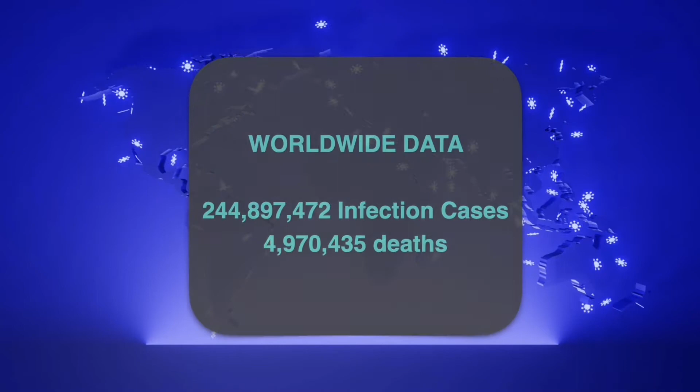What is COVID-19? COVID-19 is an ongoing global pandemic of coronavirus disease 2019, caused by severe acute respiratory syndrome coronavirus 2. It was first noticed in Wuhan, China in December 2019. The World Health Organization (WHO) declared a public health emergency of international concern on 30 January 2020, and a pandemic on 11 March 2020. The disease is the third coronavirus of the 21st century. The latest global update on COVID-19 cases is over 200 million infections with about 4 million deaths.

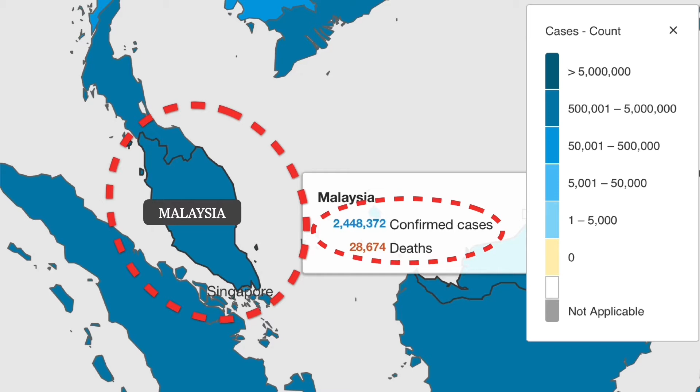For Malaysia's latest update, over 2 million cumulative infection cases with above 28,000 deaths. This data was retrieved from the WHO website on 28 October 2021.

Where did coronavirus originate? COVID-19 is first speculated to have originated from bats, to animals sold for food at the market in Wuhan, China. Recent studies have confirmed that bats constitute a reservoir for the COVID-19 virus.

Why is it dangerous to us? The virus spreads on moisture droplets through the air or surfaces, eventually finding its way inside our bodies, typically through the eyes, nose, and mouth. The virus is transmitted through the respiratory tract when people breathe in droplets and tiny airborne particles released from infected people when breathing, talking, coughing, and sneezing.

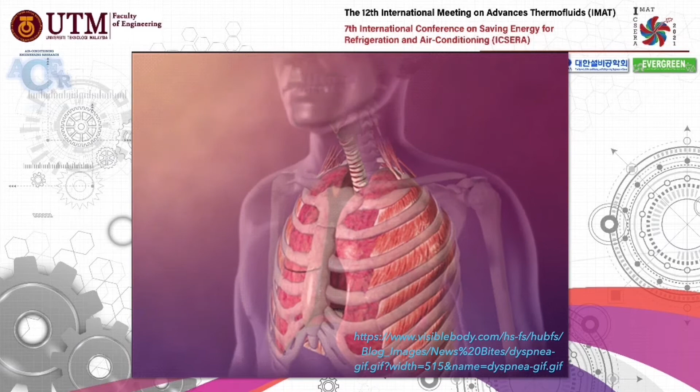The probability of inhaling these droplets is highest when people are adjacent to the infected one. Infected people are more likely to transmit COVID-19 when they are physically close. The droplet size is between 1 to 10 micrometers in diameter. The larger droplet, between 5 to 10 micrometers, travels a shorter distance, between 1 to 2 meters from its source.

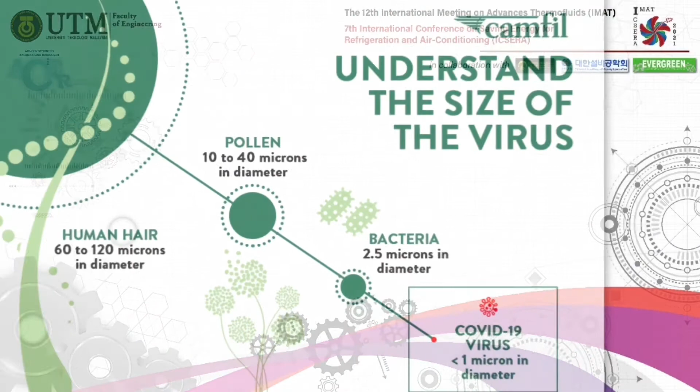The illustration shows a comparison in diameter between the COVID-19 virus relative to several other particles and human hair. This figure shows that the COVID-19 virus is the tiniest, yet dangerous.

The larger droplet usually settles on the ground due to gravitational effects, especially indoors. The infected person may remain contagious within 20 days and spread the virus even if they do not develop symptoms.

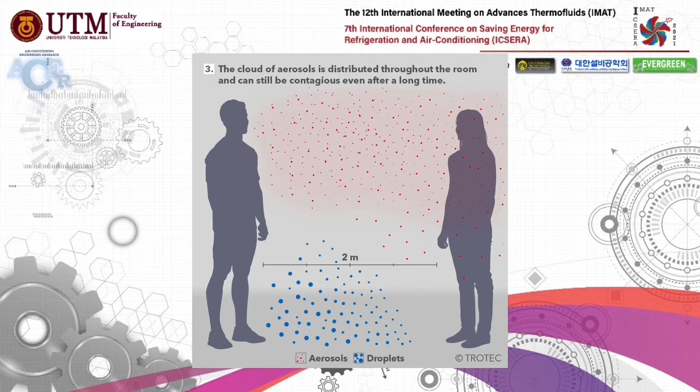On the other hand, the tiny droplets, known as aerosols, less than 5 micrometers in diameter, travel exceeding 2 meters and stay in the air for 3 hours, affecting a secondary recipient without contact with the first host.

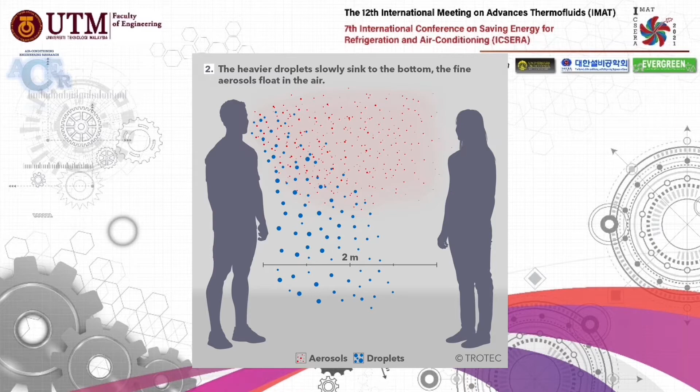How dangerous is the virus to us? The coronavirus invades the cells in the back of the infected person's nose, reproducing and spreading downward, infecting healthy cells along the way.

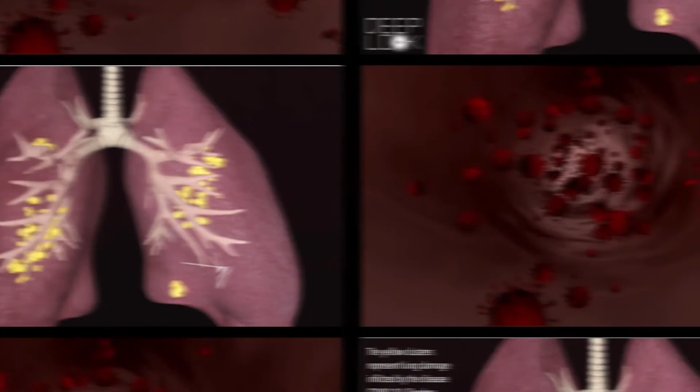COVID-19 harms the lungs of people who are affected by the disease. These lung injuries can lead to acute respiratory distress syndrome, from which most people with COVID-19 die.

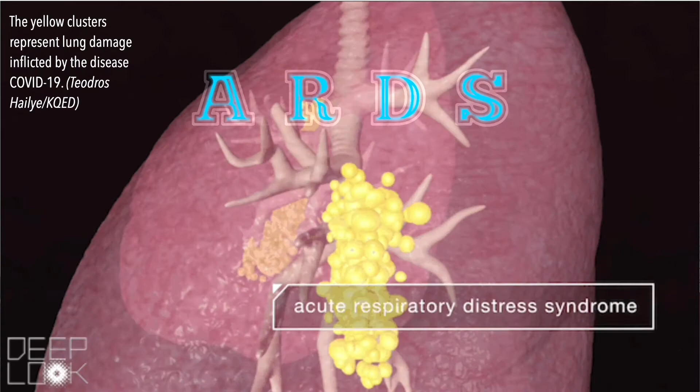Acute respiratory distress syndrome is a severe lung problem. Fluid builds up in the lungs, causing breathing failure and low oxygen levels in the blood. ARDS is life-threatening because it keeps organs like the brain and kidneys from getting the oxygen they need to work. It can also put a strain on the heart.

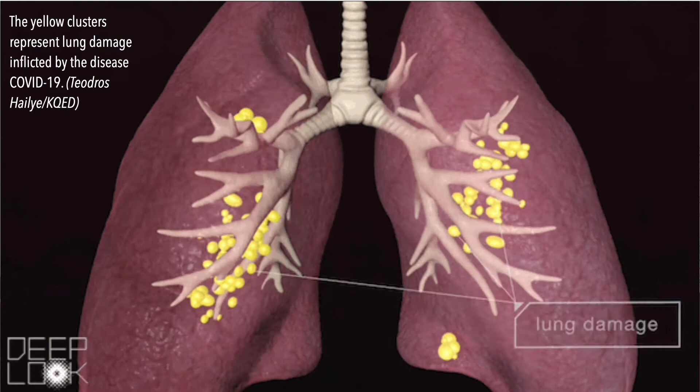Based on the animation, the yellow clusters represent lung damage caused by the disease COVID-19.

Three common clusters of symptoms have been recognized. The first is the respiratory symptoms cluster, with cough, sputum, shortness of breath, and fever. The second is the musculoskeletal cluster, with muscle and joint pain, headache, and fatigue. The last is digestive symptoms, with abdominal pain, vomiting, and diarrhea.

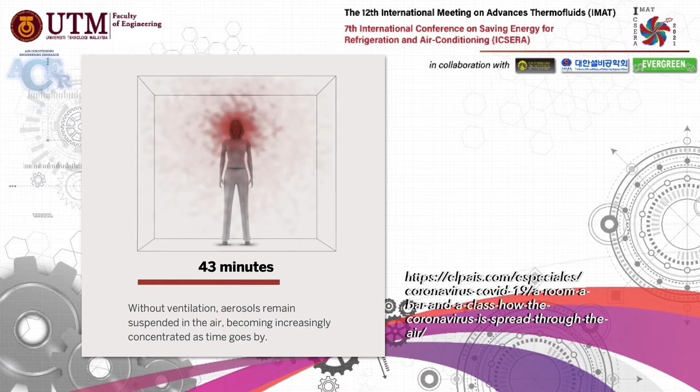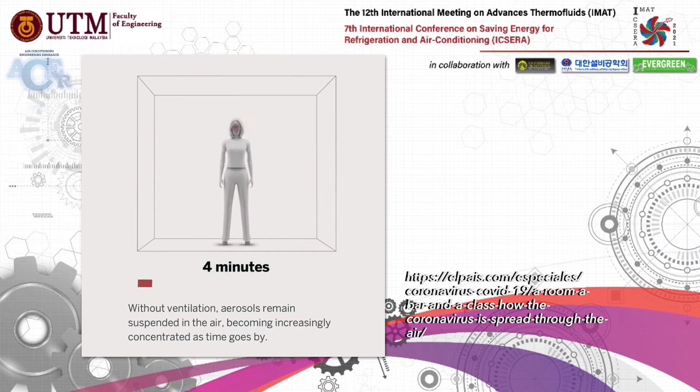Droplets or aerosols are an essential source of contagion in confined spaces. Based on the simulation displayed, without ventilation, aerosols remain suspended in the air, growing in concentration as time goes by. Recent studies reported that the majority of COVID-19 infections occurred indoors.

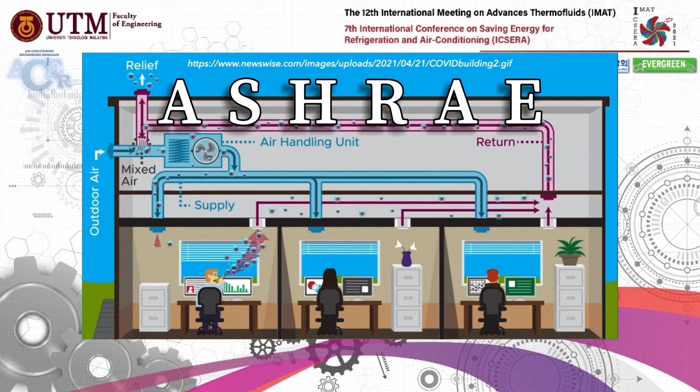Many researchers agree that a proper ventilation system is essential to combat the COVID-19 virus inside indoor spaces. The American Society of Heating, Refrigerating, and Air Conditioning Engineers (ASHRAE) has introduced and adopted a new direction to alleviate airborne transmission inside buildings. The regulation focuses on increasing the air exchange rate, supplying adequate outdoor fresh air, filtration, and extending ventilation duration.

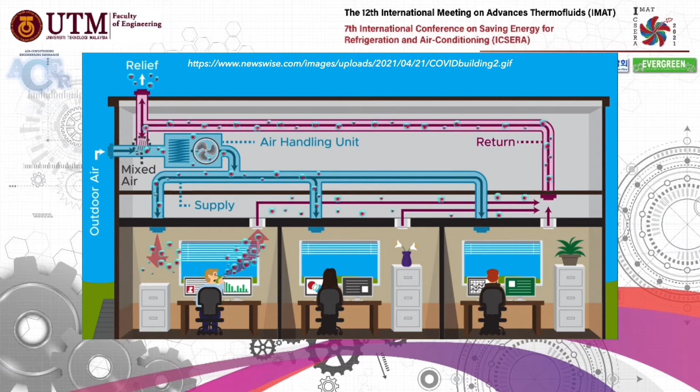The ventilation system's performance is determined through airflow characteristics and the air exchange rate. What is an air exchange rate? It is the number of times per hour that fresh air from outside enters a room and is mixed and exchanged with stale air from inside. The air exchange rate tells us how fast we can clear the room of any airborne contaminants.

Why is this important? Because if the air change rate is too high, a room loses energy spent on cooling. If the rate is too low, the room air becomes stale and stagnant, leading to a build-up of toxins, viruses, and pathogens.

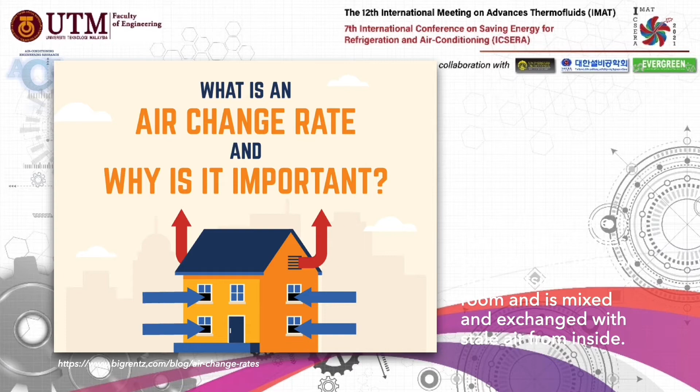Based on this illustration, two types of airflow enter the house: fresh air from outside and cold air from the air conditioning's specified air vents.

The purpose of this airflow is to exchange air with the warm air inside. This process repeats, and the number of cycles is based on the number of occupants, building location, and type.

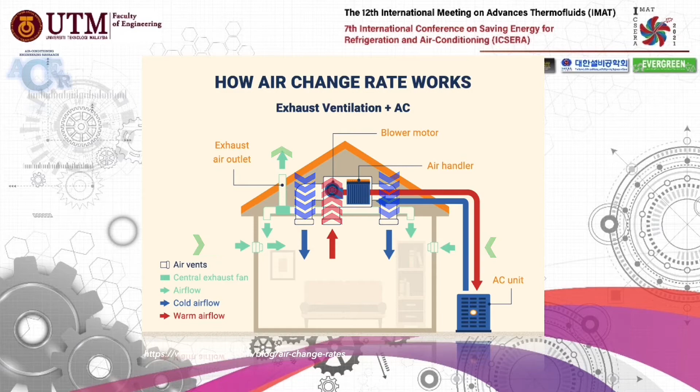Understanding the air exchange rate of a building is essential for health.

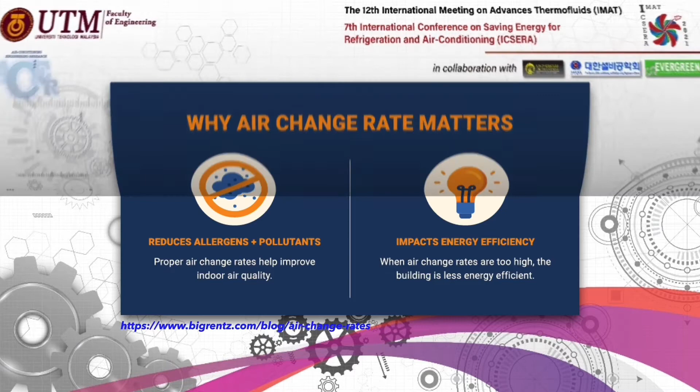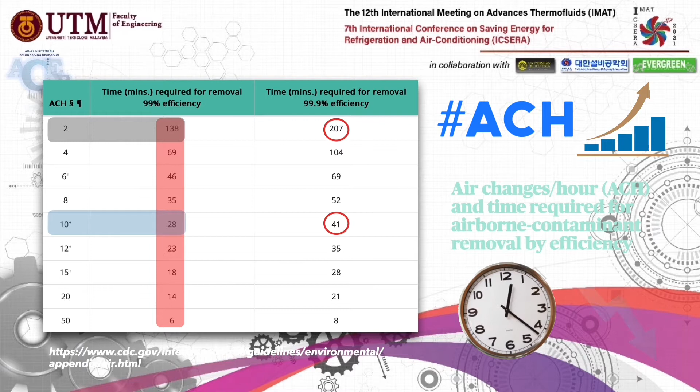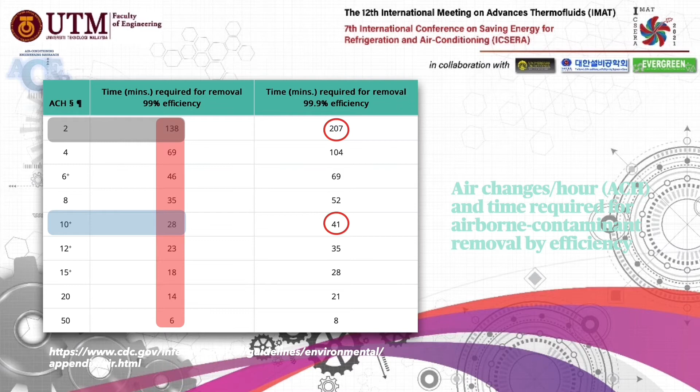ASHRAE recommends 3 to 6 air changes per hour for offices and schools to help with the pandemic. The higher rate can be accomplished by opening doors and windows and using filtration systems.

However, the trade-off from increasing the air exchange rate is decreased energy efficiency.

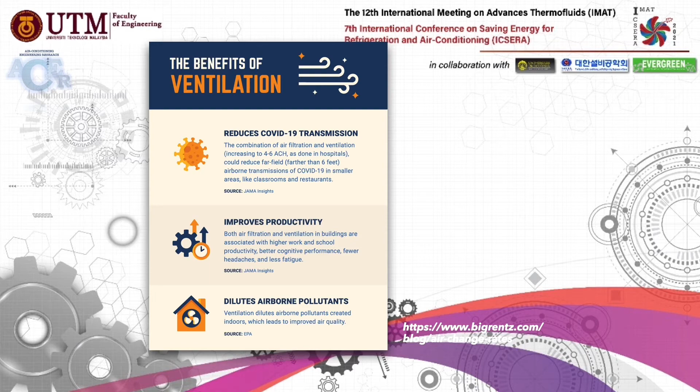When inside air is mixed with outside air at the proper frequency, air quality increases and the chances for epidemics or other health risks decrease.

Not only that, but an excellent air exchange rate, utilizing both passive ventilation such as doors and windows and active ventilation

such as heating, ventilating, and air conditioning systems, helps ensure that everyone inside is as comfortable as possible.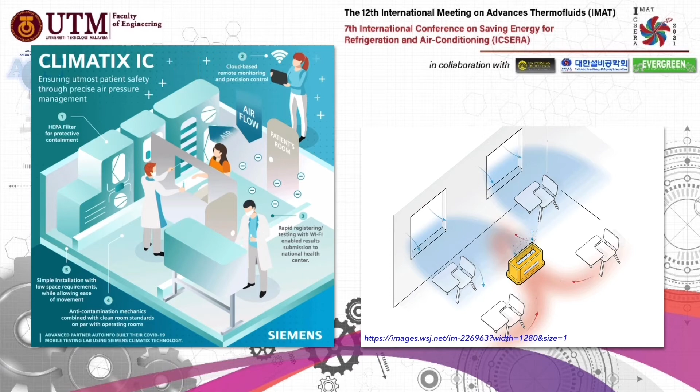There are various methods used to analyze the airflow characteristics and ventilation performance inside a building.

The commonly used methods are empirical models, analytical models, zonal models, multi-zone models, small-scale experimental models, full-scale experimental models, and computational fluid dynamics models.

However, the most attractive method is computational fluid dynamics modeling, since it is the most reliable

to assist in the design and evaluation of the performance of a ventilation system regarding thermal comfort and air quality.

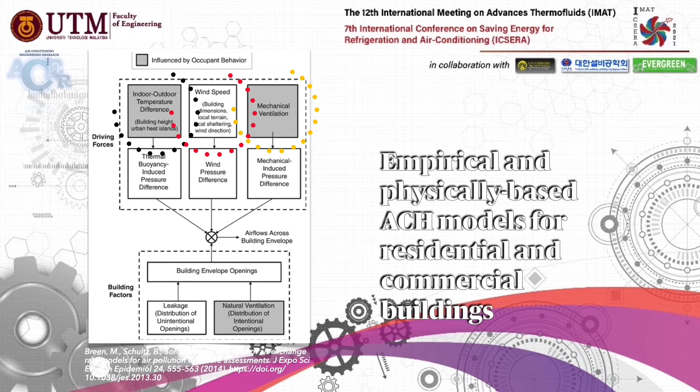The study uses a building dynamic simulation tool, IDA, Indoor Climate and Energy. This tool is used to predict thermal comfort, indoor air quality, and energy needs in buildings.

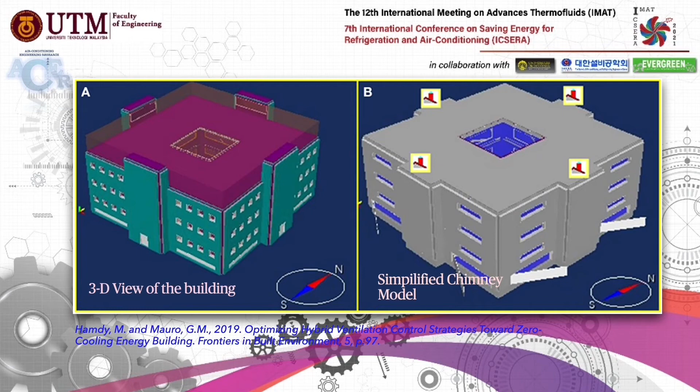As mentioned earlier, computational fluid dynamics models are the most attractive method since they are the most reliable to support designing and evaluating a ventilation system's performance regarding thermal comfort and air quality.

CFD simulation is an essential tool for designing ventilation systems in critical healthcare facilities. In this model, the researcher is tracking particulates within the room and showing air velocity gradients.

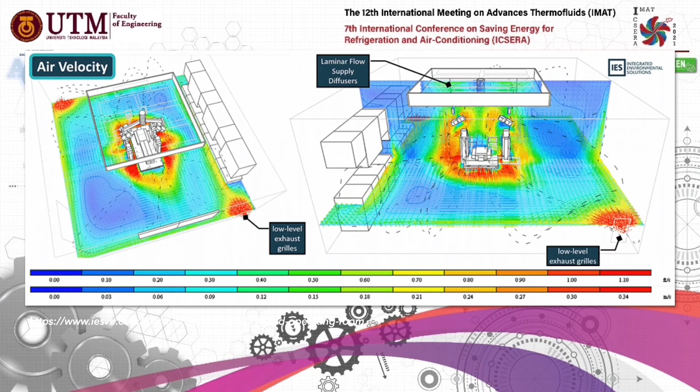The model was developed using specific information based on a typical operating room, following ASHRAE Standard 170 for ventilation of healthcare facilities.

As for the conclusion, a fundamental approach to lowering the concentrations of indoor air pollutants or contaminants, including any viruses in the air, is to increase ventilation, the amount of outdoor air coming indoors.

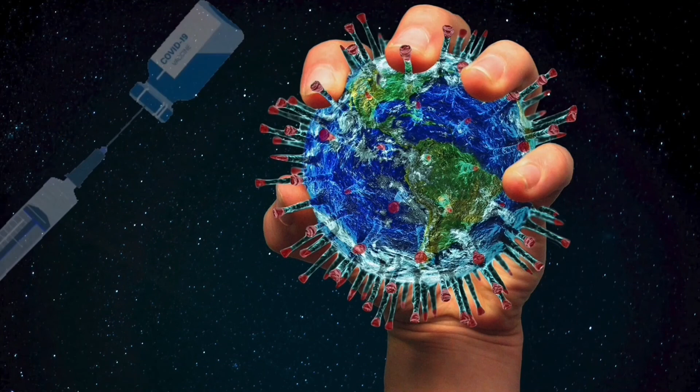Controlling the environmental conditions of a confined space may offer a feasible solution to increasing the inactivation rate of the COVID-19 virus.